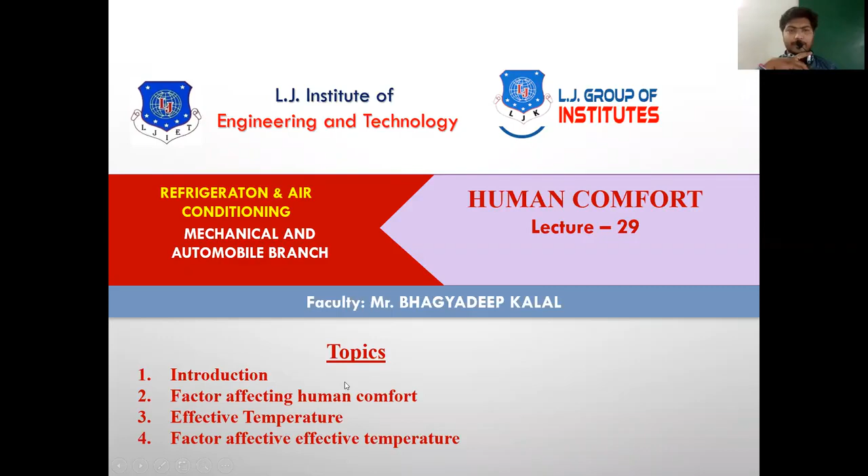What do you mean by human comfort? According to ASHRAE, the American Society of Heating, Refrigerating and Air-Conditioning Engineers, it is defined as the condition of mind which expresses satisfaction with the thermal environment and is assessed by subjective evaluation.

The meaning of human comfort is the satisfaction of mind. It cannot be evaluated for a particular person because satisfaction differs from person to person. Some person's body wants 28 degrees for comfort, maybe some person wants 30 degrees. The temperature varies according to the person. That's why it cannot be evaluated perfectly.

A cold sensation will be pleasing when the body is overheated. If your body is heated, we sense the need for a cold temperature or cold sensation, but it is unpleasant when the core is already cooled. Thus, the sensation from any particular part of the skin will depend on the time, location, and clothing as well as the temperature of the surroundings.

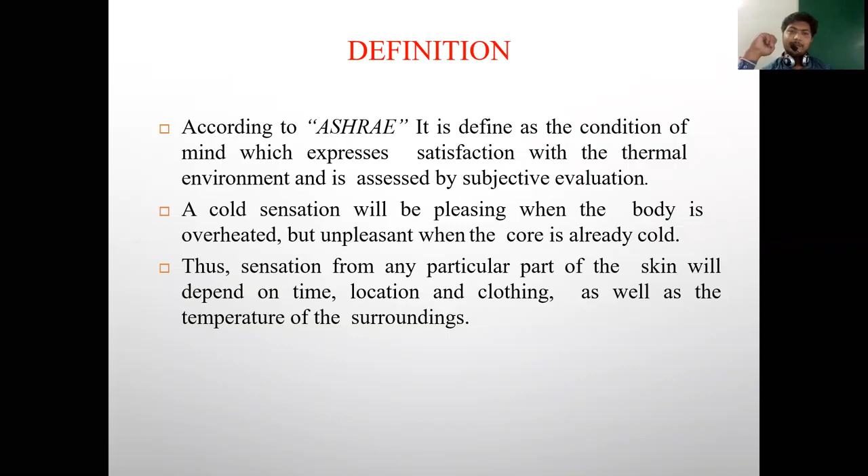So next, thermal comfort is difficult to measure because it varies from person to person. It is highly subjective. But we conclude that human comfort depends on air temperature, humidity, radiant temperature, air velocity, metabolic rate, and clothing level or the type of cloth we wear. Each individual experiences this sensation a bit differently based on his or her physiology.

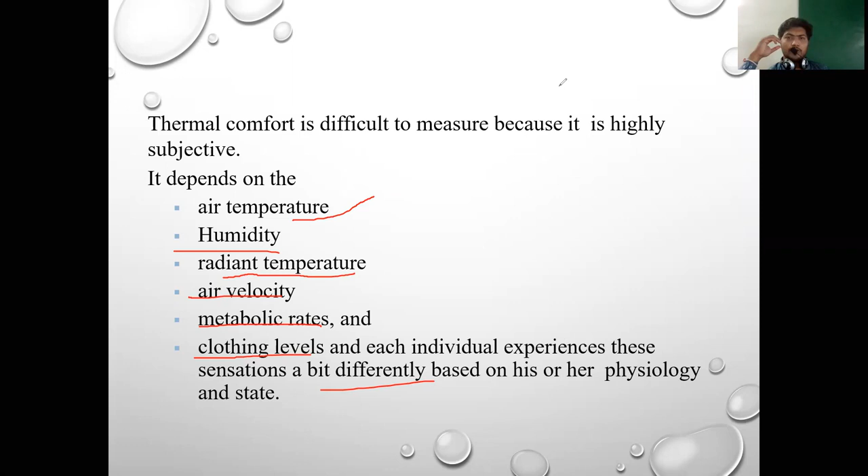So which factors affect human comfort? Basically, metabolic rate, clothing insulation, air temperature, radiant temperature, air velocity, and relative humidity. Here, metabolic rate and clothing insulation are personal factors which affect human thermal comfort. They depend on the person.

But air temperature, radiant temperature, air velocity, and relative humidity depend on environmental factors. That means they depend on the atmospheric condition. Clear? Okay. So now we discuss one by one how each factor affects it.

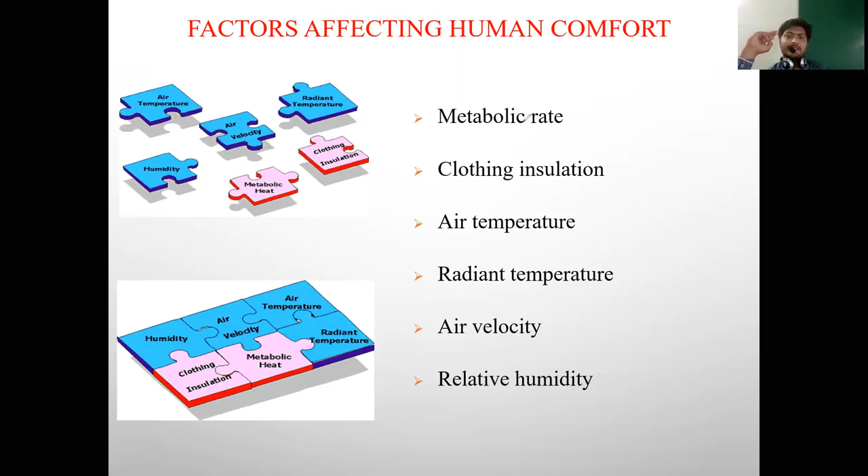So first, air temperature means the dry bulb temperature, which was already explained. Dry bulb temperature is the temperature of the atmospheric air surrounding the body, which we sense. The degree of hotness or coldness is known as temperature; the basic temperature of the atmosphere which we sense is known as air temperature. It is an environmental factor.

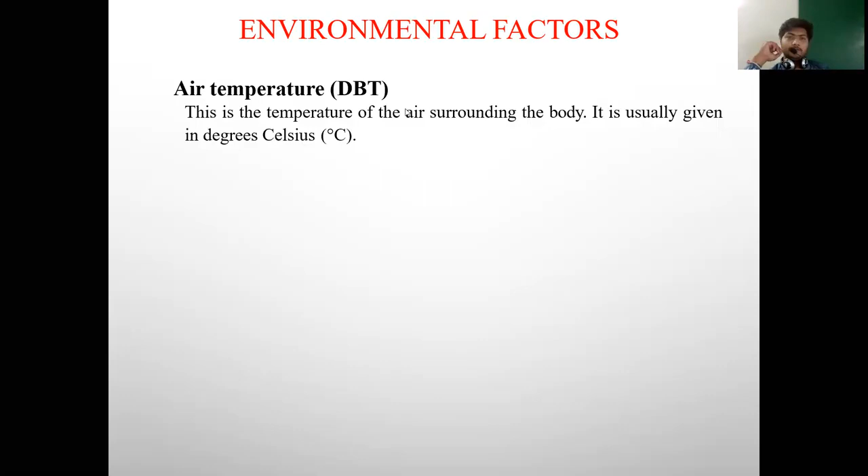Next, radiant temperature. What do you mean by radiant temperature? It is the temperature we get from a thermal body or any warm object, like the sun. Suppose we are standing outside, in front of the sun, so thermal radiation comes directly on the body, or from a fire or an electric fire. We also call it solar radiation. Thermal radiation is the heat that radiates from a warm object.

Radiant heat may be present if there are heat sources in an environment. Which types of heat sources are there? The sun, fire, electric fire, oven, cooker, dryer, hot surfaces like machinery, molten metals; all are warm objects which radiate heat. The radiant temperature has a greater influence than air temperature or dry bulb temperature. Clear?

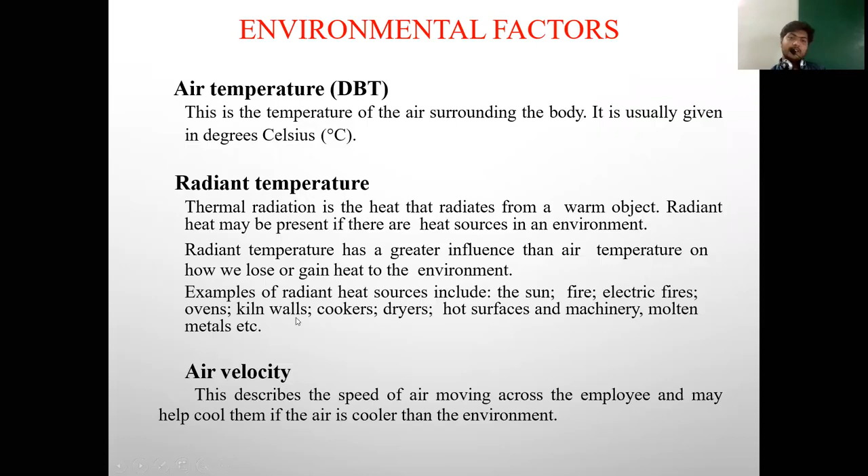Next, which other environmental factor affects human comfort? It is air velocity. Air velocity is one of the factors which affect human comfort. It describes the speed of air moving across the employee, person, or occupants. It may help cool them if the air is cooler than the environment. If the air is cooler, then it may help to cool the occupants. Okay.

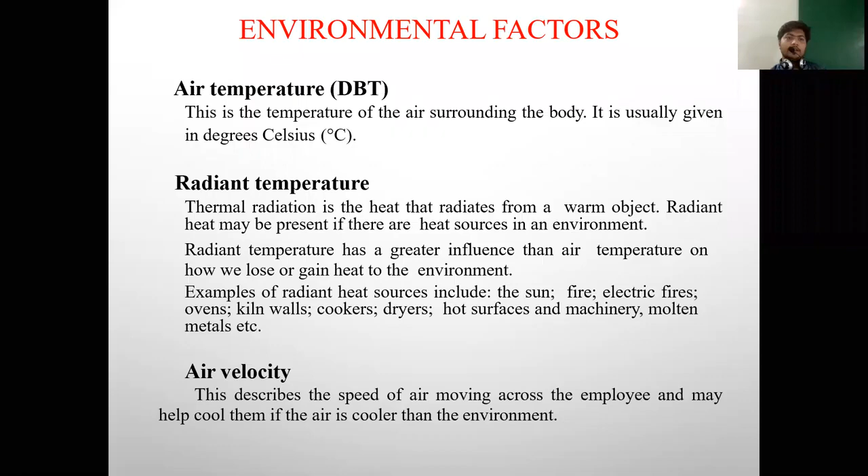Next, relative humidity. What do you mean by relative humidity? It is the water vapor present in the air. Relative humidity between 40% and 70% does not have a major impact on thermal comfort. Relative humidity between 40% and 70% does not affect the body or occupants.

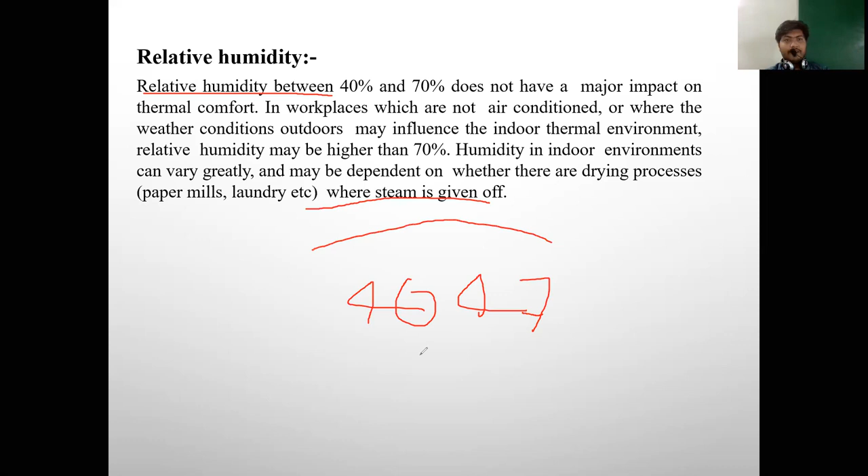But if it increases above 70%, that means 70, 80, 90% humidity, that affects the human body, like if the indoor thermal environment relative humidity may be higher than 70%. Just an example, indoor environments like a paper mill, laundry, steam power plant, boiler, where relative humidity is higher than normal conditions. So that's why if relative humidity is above 70%, it affects human comfort. So these are the factors affecting human comfort from the environmental point of view.

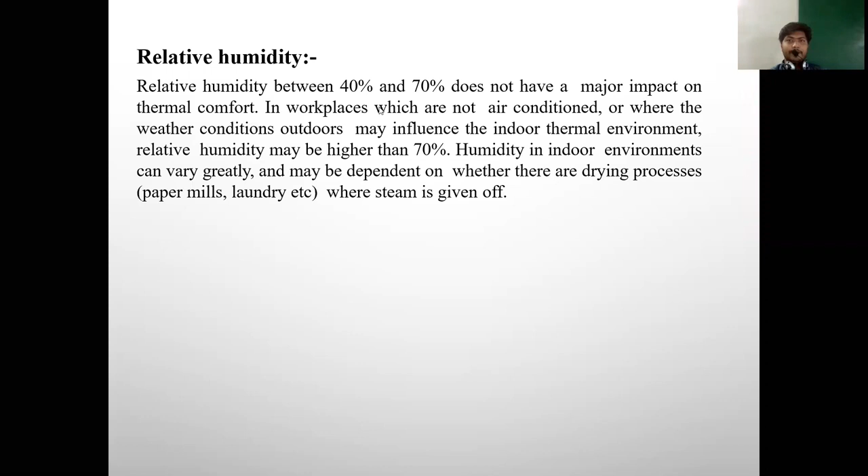So next, personal factors. Which are the personal factors? First one is metabolic heat or the metabolic factor, that depends on the person, that's why it is known as a personal factor. So what do you mean by metabolic rate? Chemical energy in terms of food is converted into heat and work by doing some work; this is known as the metabolic rate. So conversion of chemical energy into heat and work is known as metabolic rate.

The more physical work we do, the more heat we produce. If we work more, like if we do gym, more heat will be produced. Or we work at a fitness level, weights or any work, then we produce more heat. The more heat we produce, the more heat needs to be lost, so we don't overheat. The impact of metabolic rate on thermal comfort is critical.

The person's physical characteristics should always be borne in mind when considering their thermal comfort, as factors such as their size, weight, age, fitness level, and sex can all have an impact on how they feel, even if the other factors such as air temperature, humidity, air velocity are constant. That means if the environmental factors are constant, but we do more physical work, it produces more heat. It depends on metabolic rate.

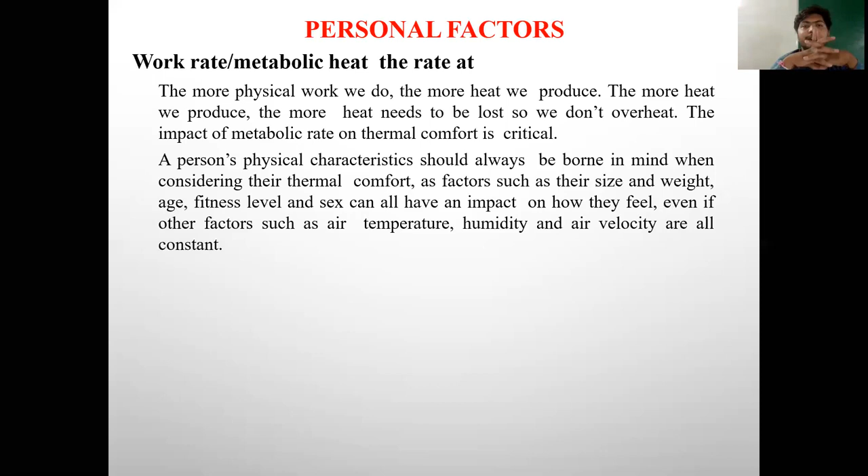Next, clothing insulation. We already understand clothing insulation. If we wear a PPE kit or winter clothes in the summer season, it will affect heat loss. If clothing does not provide enough insulation, the wearer may be at risk from cold injuries such as frostbite and hypothermia in cold conditions. Meaning, in the winter season, if we do not wear enough insulation or winter clothes to prevent the cold, it may cause injuries. So it depends on clothing insulation. These are the two main factors: metabolic rate and clothing insulation.

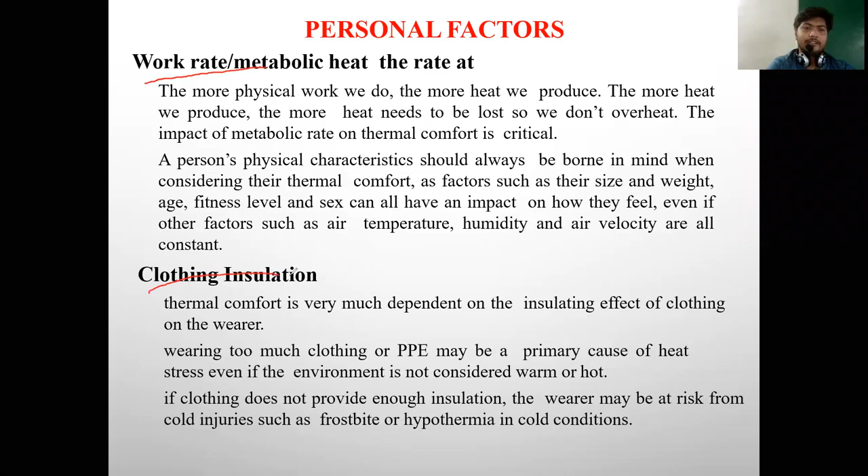Next, effective temperature. What do you mean by effective temperature? It is a most important topic. The degree of comfort felt by the human body depends mainly on three parameters. One is the dry bulb temperature, which we already studied, the temperature of the atmosphere; second, relative humidity, the mass of water vapor present in 1 kg at actual condition to saturation condition; and third is the velocity of air. These three factors are mainly responsible for the comfort felt by the human body.

So in order to evaluate or calculate the combined effect of these three factors, DBT, RH and air velocity, the term effective temperature is used. Effective temperature is defined as the temperature of standard air. What do you mean by standard air? That means 100% relative humidity at zero velocity, at which a person feels the same feeling of comfort as felt in the actual environment. That is the main definition of effective temperature.

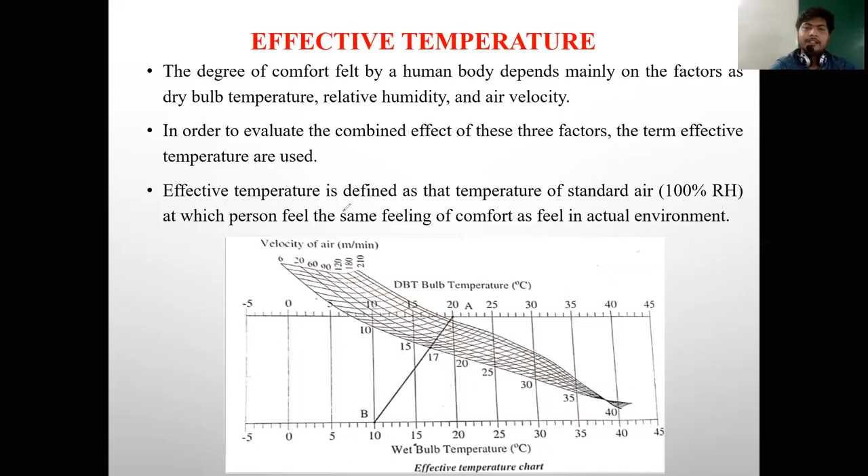If I say for this dry bulb temperature and wet bulb temperature, if the velocity is 180 meters per minute, what will be the effective temperature? The line intersects the AB line, which means the effective temperature is around 19.5 degrees centigrade. So this way we calculate the effective temperature by using the effective temperature chart. Okay, clear everyone? So next topic, factors affecting optimum effective temperature.

Factors affecting optimum temperature. The first factor is climate and seasonal difference. How does climate and seasonal difference affect the effective temperature? Because for a person who is living in a cold place, their effective temperature is lower. So if this person comes to some other place, the season will be different, so the effective temperature for that person will change. That means climate and seasonal difference is the main factor on which effective temperature depends.

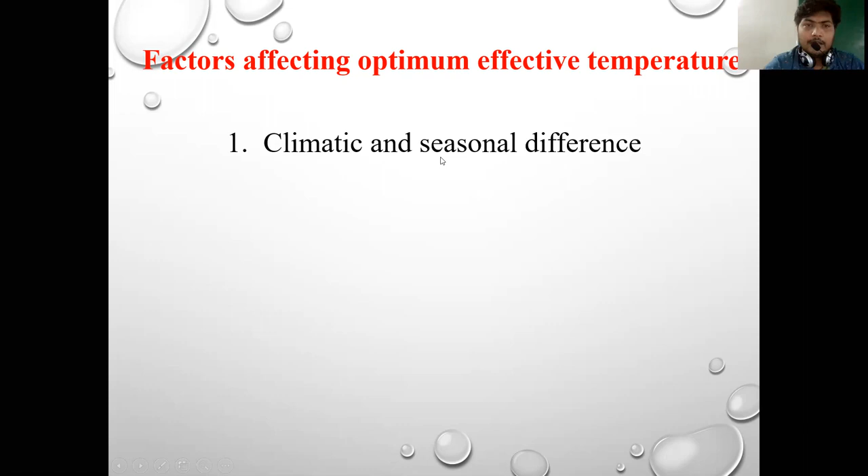Next, clothing. We already studied how clothing factors affect the effective temperature. Next, age and sex. How do age and sex affect the optimum effective temperature? The metabolic rate of women is less than men by nature itself. So women of all ages require a higher effective temperature than men, like 0.5 degree or 1 degree more than men.

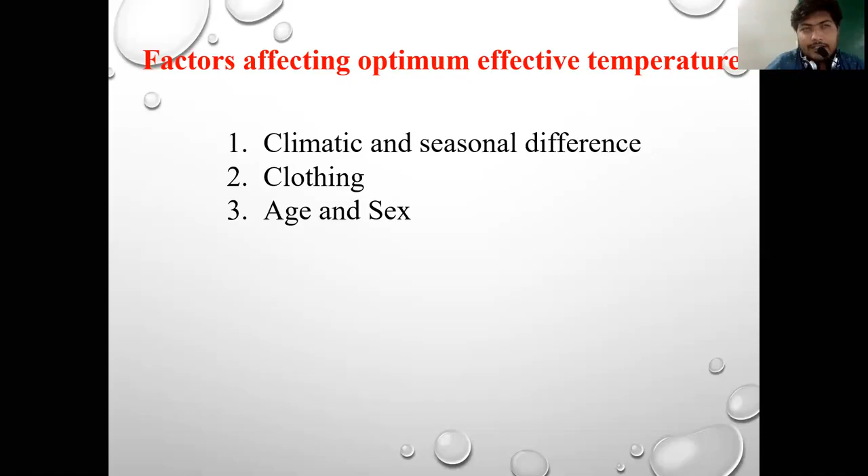Similarly, in the case of young people and old people, children also require more effective temperature. Okay, a maternity room requires more effective temperature. Next, duration of stay. This factor also affects the effective temperature. How? If the stay in the room space is shorter, as in the case of a person going to the bank who stays hardly 5 to 10 minutes, then a higher effective temperature is required than when the stay in that place is longer. That is the duration of stay.

Next, kind of activity. Kind of activity also affects the effective temperature. If physical work is more, then the effective temperature required is less. Next, six, density of occupants. Density of occupants means the effect of body radiant heat from person to person, particularly in a dense space like an auditorium, which requires a slightly lower effective temperature. That is the density of occupants. So these are the factors which affect the effective temperature.

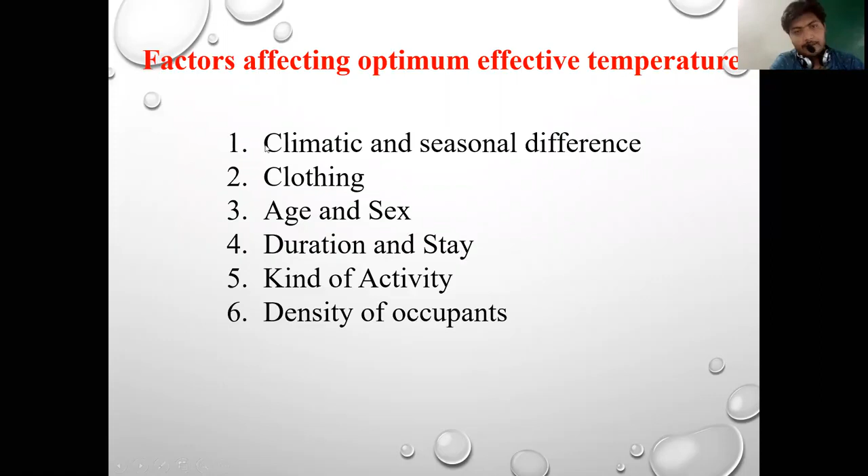Again, I repeat: climate and seasonal difference, clothing, age and sex, duration of stay, kind of activity, and density of occupants. So just remember these points and write them in your own way.